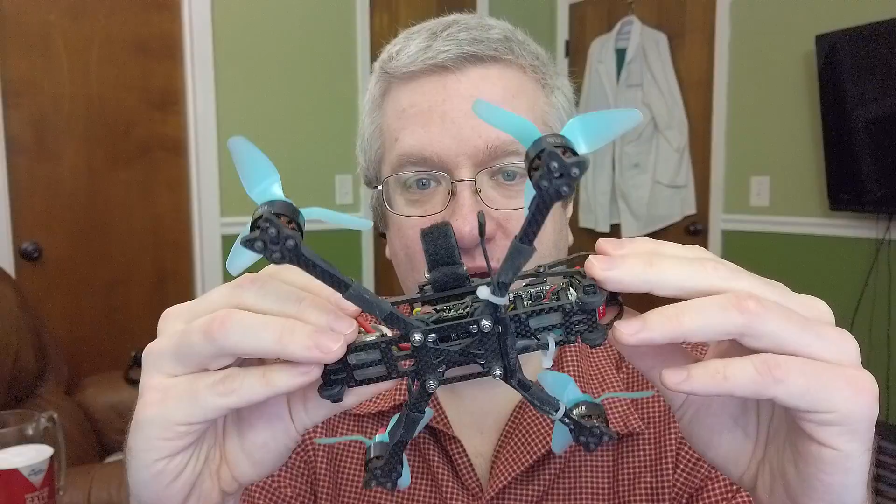But, yeah, so this is my 4-inch Kestrel. I've got 3-inch props on it to test out right now, but I'm excited about this. I don't know if it's a unique design because I'm borrowing the grommets from the Acrobrat, but it's at least unique in that it's like an Acrobrat, but it's lighter, it has replaceable arms, it's open source, and it's very easy.

I'll show you today how you modify the arms in different configurations. You can just punch in an angle, you set this angle here, and you set the length from this point here out to the motor. And you can put whatever size props on here you want. If you want a very H frame, you can make an H frame. If you wanted a stretch X and you can see the props up here in your camera, you could do that. But that's not what we're trying to do with this.

The Kestrel's supposed to be an HD micro frame with no props in view. And with the 4-inch props, there's a tiny bit of prop in view until you do your lens correction. But I'm not too unhappy about that. But this is an interesting design. It's not the style of frame I would usually fly, though.

I fly the Hyperlight Flow Ride. We ended up focusing on Bob Rugi's frames, Kabab FPV. He makes fantastic frames for a good price. I remember at the time that I was finally going to move away from a racing style frame to a freestyle frame, I was looking at either the Hyperlight Flow Ride, these are about $45 for a frame, or the Armattan Chameleon, and they're, I don't know, what are they, $110, $120 a frame?

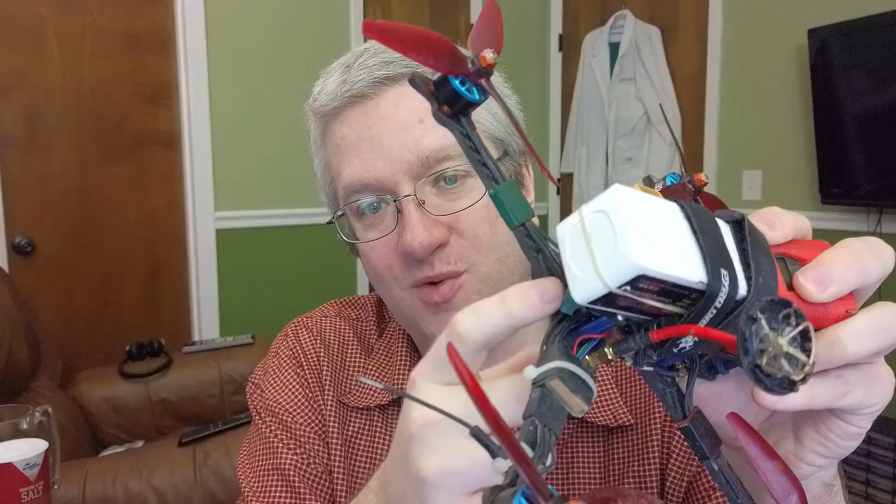And I like this layout. There's a 30 by 30 stack in the middle. There's space up in front. Not quite a 20 by 20 stack, but I've got my VTX up there. And it's just big enough for a micro camera, like a Runcam Eagle Micro. And there's hardly any room in the back, but there's just enough room for me to squeeze in my crossfire in the back. So I've got a crossfire in the back and my VTX up front.

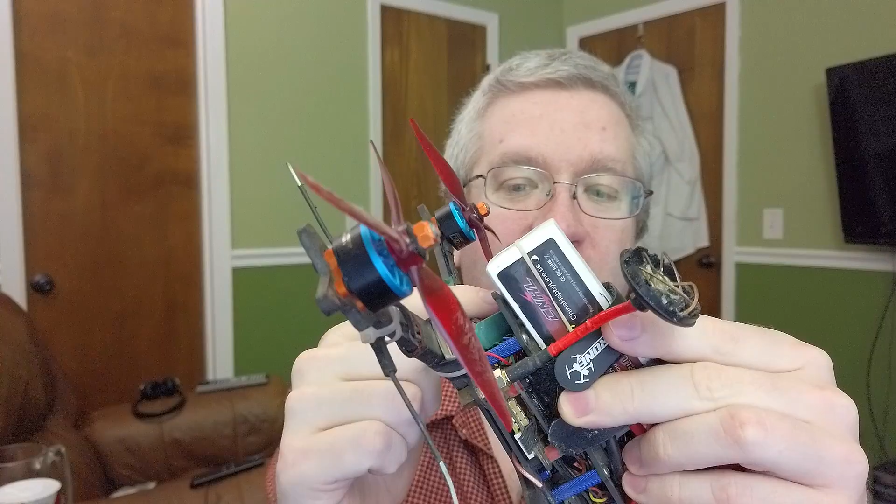And kind of a unique thing about the Flow Ride is that it comes with a back plate here. I don't know how to get this into the camera very well, but the back plate sticks off just about an inch past the bottom plate, which gives you room to keep your battery up on there without it hanging out and flapping around in the breeze. And that doesn't add much weight, and I like that.

About a week after I bought my Flow Ride, oh, hey, Judy's not, there she goes. Less than a week after I bought my first Flow Ride, Kebab released the Floss Style. And I really like the Floss Style. It adds a 20 by 20. The front end is very much like the Flow Ride, and the back has a 20 by 20 stack.

And I think the Floss Style is interesting because the top and the bottom plate are the same piece of hardware. They're interchangeable. So you can just buy spare plates and they work no matter which one you break, and I think that's pretty neat. Today he's got the Glide frame, which is a lot like the Floss Style, but it has a real 20 by 20 stack in the front, and it's probably a little bit nicer of a frame.

And I would probably move up to the Glide today if I were buying a frame, and they're reasonably priced. I think the Floss Style was about $5 or $10 more than the Flow Ride, and the Glide is another $5 or $10. It's still inexpensive. And I have no idea that I would sell my own frame, but I'd like to fly my own frame. Isn't that what I should be doing?

So I started laying down parts in the CAD. I decided that the Kestrel and the Falcon, they're both open source. It's the Falcon. I didn't tell you that, did I, Judy? The new frame's going to be called the Falcon because a Kestrel is a tiny falcon, and this is bigger, so we'll just call it a Falcon. Seems smart to me, right?

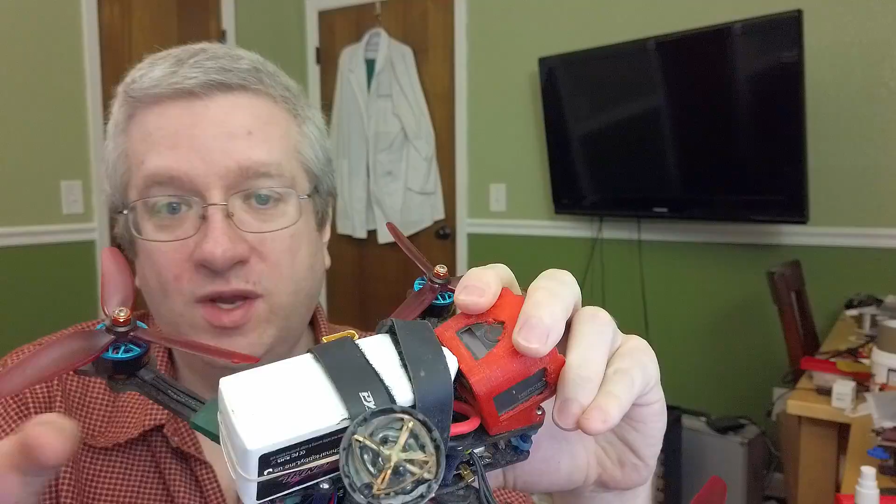Oh, geez, Judy's losing me. She's losing my face. Where am I?

She found me. So we'll have room for the 20 by 20 stack in the front, the 30 by 30 or a 20 by 20 in the middle, and an optional stack in the back. So everything up to right here will always be the same on my frame, but depending on how you configure it, you can have a third stack in the back.

You can have a truncated bottom plate and a fully truncated top plate, like one of the Flow Ride plates, or a slightly longer top plate, a less truncated top plate with room for another battery strap, so you can get two battery straps around your battery real good and still have the short frame. Because I think I like this layout with the VTX up front and the Crossfire in the back, and I could reverse that. I don't really care. Well, I can't reverse it if I stick with the Flow Ride style.

I'm going to turn my little Osmo Pocket off here. I'm going to switch to my webcam. Oh, you should see, the white balance is terrible over there. But I'm going to switch to OBS here, and I'll point out what I'm working on, and we'll see how I end up editing this.

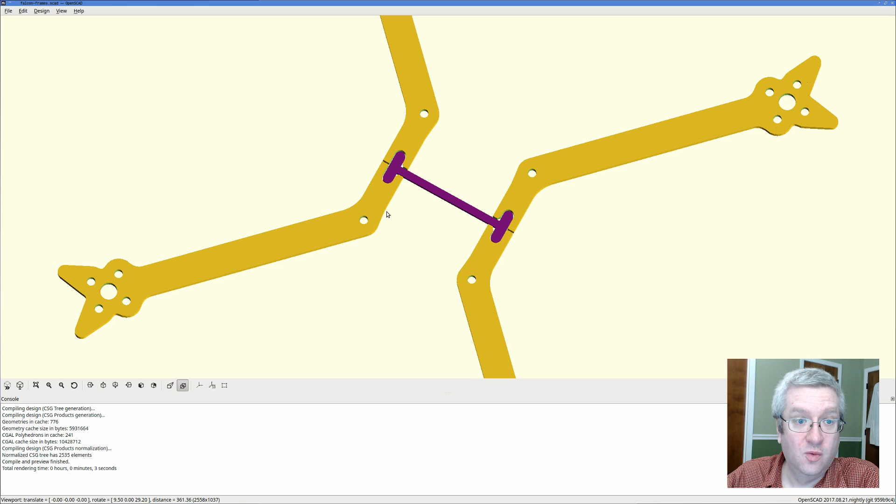We're going to start with the arms, Judy. This was the original plan here. These are the Kestrel's arms, but made longer. If we pop over to Emacs here, each Falcon frame will have its own configuration file, and I'm going to break some of this out.

A lot of this, like the frame width and stuff here, this will be for all Falcons, so that'll be in another config file, and then other things will be, like this is a 6-inch Falcon I'm working on. 25.4 millimeters times 6 is a 6-inch propeller.

But these are pretty much the Kestrel's arms, except I've made them 12 millimeters wide instead of 6 or 7 or whatever they are in the Kestrel. And yeah, this is pretty much what you get out if you put in slightly different numbers for the Kestrel. I don't think I can get away with using the wedge. And oh, for some reason my wedge is a millimeter too short. I must have a missing variable somewhere.

I don't think I can get away with the wedge because you'll see it when the whole thing is assembled, but I don't think the frame would survive one of these. It would flex quite a bit. But I'm leaving it alone.

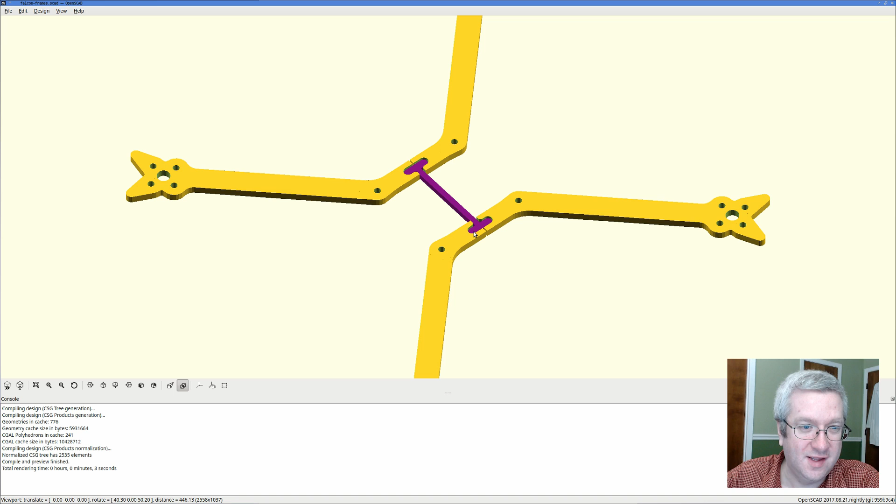I put holes in the bottom plate to line up with right here and right here, the edges of this dog bone here, so I can put screws through there. It'll be fine. I don't think it needs to be an actual hole. I think it's a slot, so you won't have to take that screw out. You might have to loosen it to change an arm. Yeah, those are the arms. They're very simple. Nothing exciting to describe there.

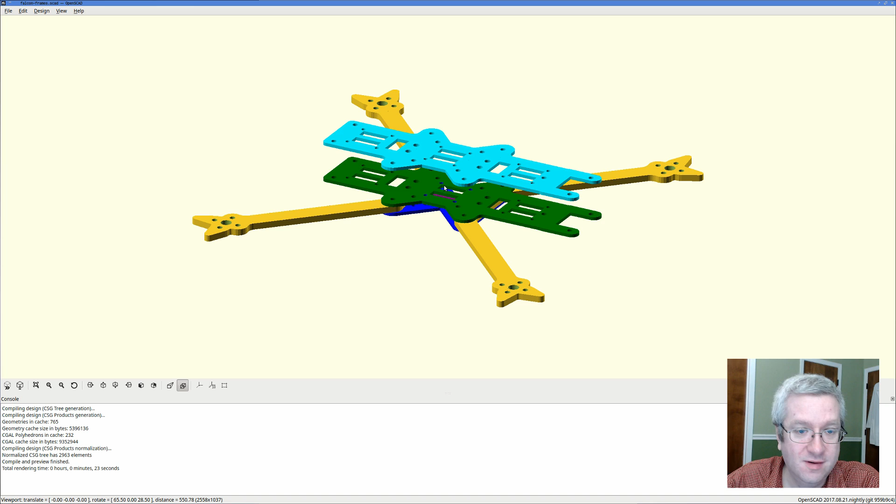So let's pop over to the big Kestrel. This is a full-size Kestrel here. Kestrel. Falcon. This is a Falcon. I hope this mic is working here. So let's pop it upside down. I re-engineered the bottom plate. Does this work if I move my mouse around so you guys can see?

These are the holes for the 20 by 20 on the inside, the 30 by 30, and these are the M3 holes for the mounts for the arm. And oh, shoot, I have to put holes in here to mount the arms. I goofed up. Make a note of that, Judy.

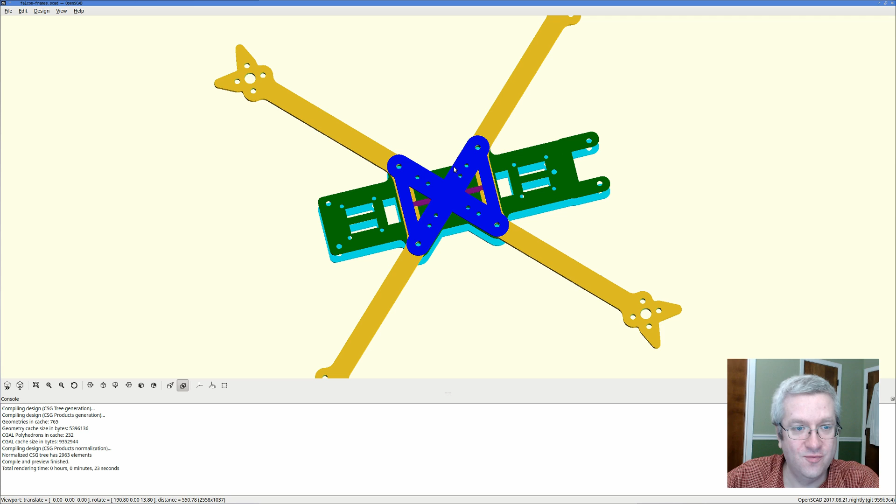So the idea here is these are at 45-degree angles. We'll cut this right along the carbon, so they'll look like they're rotated on the sheet by about 45 degrees. And that should make this pretty rigid, because the bottom plate will be cut long ways instead of at a 45-degree angle. So it'll have strength front to back, and the brace plate on the bottom will be rigid diagonally. I think that'll work out.

And I think these need to get a little bigger. There's little nubbins out here that hold the arm in place. We'll see about that. Now, the top and the bottom plate are identical. I might put a little piece of carbon underneath here to help protect the camera, but yeah, they're identical.

We're going to see where the battery ends up lining up. Maybe I should model a battery. Stick it right in here. I'm borrowing from Kabab's frames again. This is the mounting pattern for the Floss, the Flowride, the Floss style, and the Glide for the TPU GoPro mount. Not necessarily because I like that GoPro mount, but I have so many of them here. I print them all the time, and I'll just swap them over. That seems good and lazy, right? I hope so.

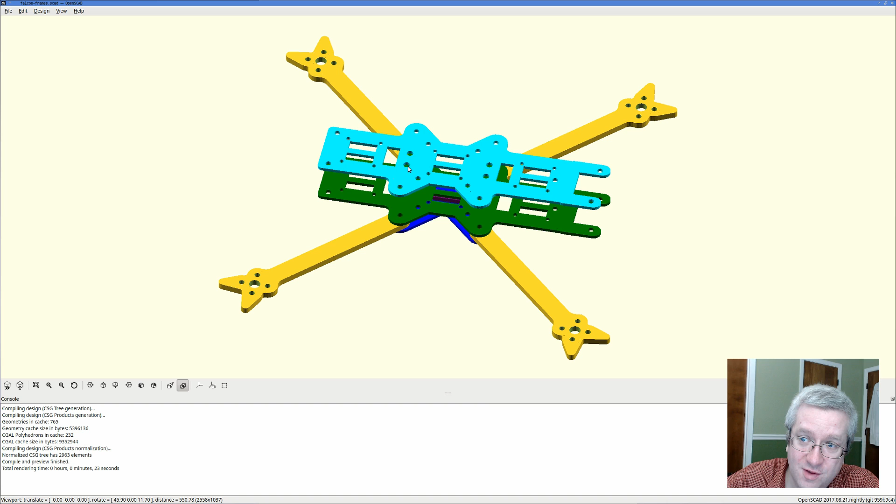But this isn't the only layout. These are the holes that I was talking about for the arms, so we can screw the arms in. But I should have one more Falcon window. Here he is. This should look familiar. It's just truncated at the back, and there's no holes back here. I have to puzzle this out and figure out exactly where the battery strap holes will go back here. Because if you're flying freestyle and you have one of these long bodies, you should have 2 battery straps. That's just how it is.

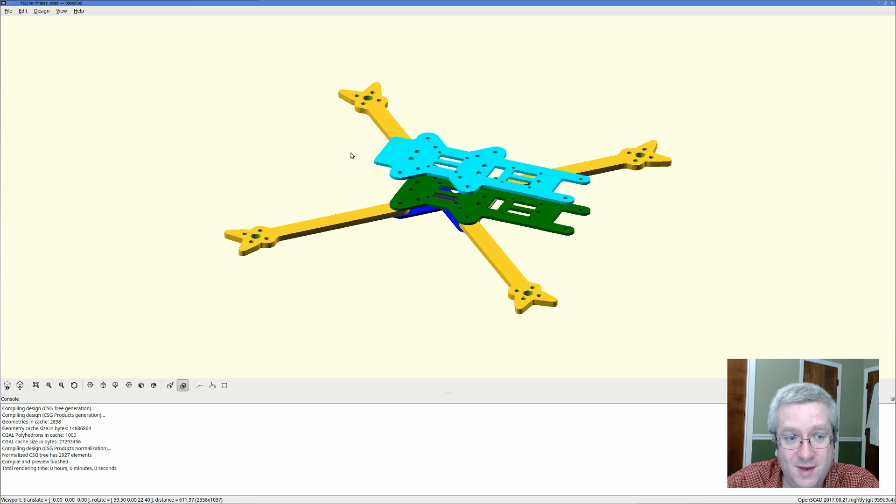Just do it. But yeah, on the Kestrel, I should have had a window with the Kestrel. On the Kestrel, these 4 bolts for the arms work great. I mean, I can flex this. It does not flex in the middle too much. These are very thin, long arms on the 4-inch, and I'm very happy with how this is holding up, and it doesn't vibrate. It's not bad. Don't think that'll work on the 5-inch.

And this is a 6-inch. I fly a 6-inch quad with 5-inch props. I like a big quad. It's just very stable. And it gives me the option of throwing 6-inch props on if I need to fly long range or something. It's just fun to have.

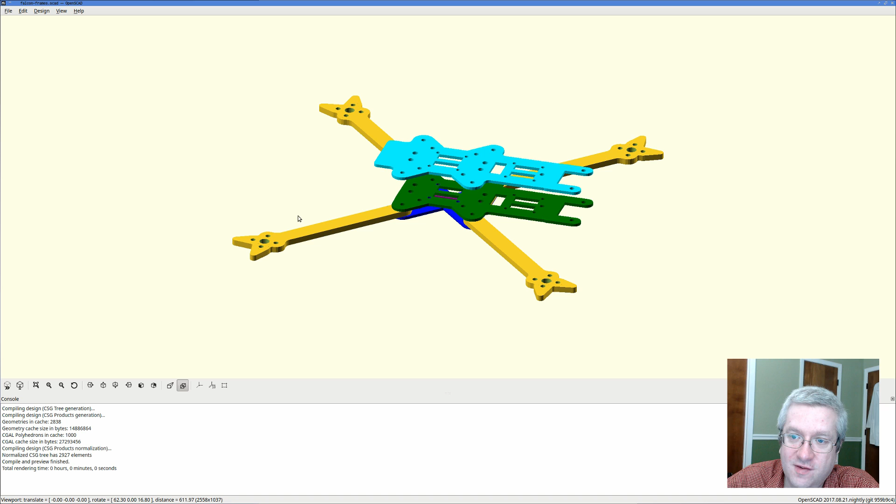Where's Emacs here? Here's my friend Emacs. And we were going to talk about arms. The arm length is from the screw hole here, the center of that screw hole, to the center of the motor. Not to the center of the frame. I'm not smart enough to set that up.

So these arms are all 105 millimeters. I think it worked out to 6 inches. I think this worked out to like 260 millimeters. I forget how I mathed it out. I don't remember. And they're right at 45-degree angles now. And I don't know if this is the way it's going to be in the final design. Let's, I can't see this because it's behind my camera.

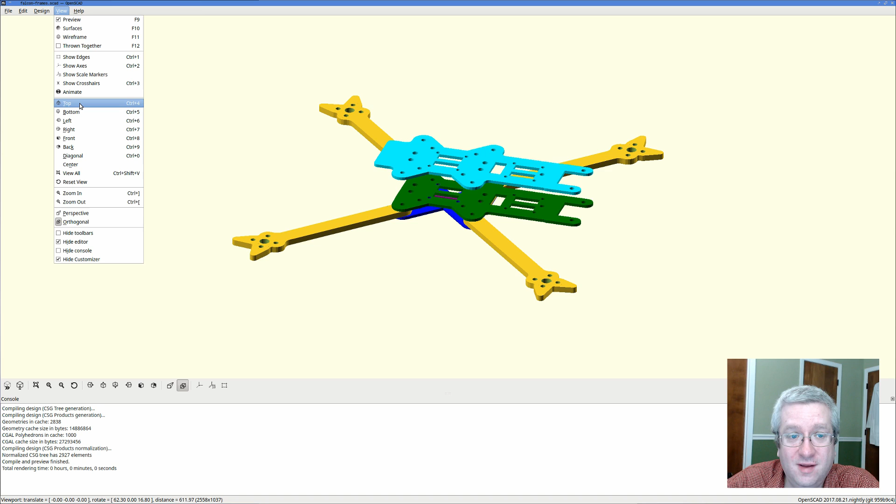So the camera lens and sensor sit real close to these screw holes, and this puts the motors on 6 inches just in front of the camera, and that's about where it is on my other frames. And this is where it's uncreative, right? I'm laying things out like the frame that I enjoy flying, that I already have, and I think that's a good place to start, and we'll see where it goes.

I have a feeling that when I cut these, none of this is going to look anything like this. I'm going to learn that this way out here, this looks like it's out in the ocean, like the dock, just sticking out there. It's probably going to look silly, but I don't know. We'll find out.

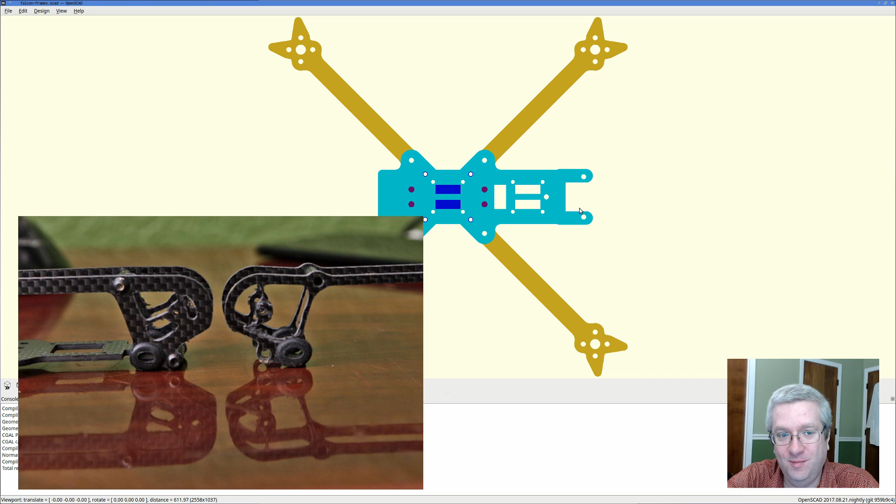When I cut the first Kestrel, this is tiny, I don't know why I'm showing you here, but the thickness of this top plate here, it's very thin now, but I said, like 6 millimeters will be fine. 5 or 6 millimeters or something. I cut it, and it was a tank. It was super sturdy, way bigger than it needed to be. It looked fine in the picture, but not in real life. So we'll see.

But I'm going to go back, I guess, to talking on the Osmo Pocket here, where I might look a little less blue.

Brian and I are talking about doing another quadcopter build class. We've done 3 of them at the local makerspace. The first time we built a 450 millimeter quadcopter, the same quadcopter that Brian was dropping fun things with last week. We built my first 3-inch quad. About a half a dozen people built the PH-145. And then we did our best to put together a kit for a budget 5-inch FPV racer. And it was all right. We did okay there. But I think things are a lot better now.

I'd like to do a class where we build a Kestrel with the HD camera, something very much like this, but with the 3-inch arms instead of the 4-inch arms. And I like the price point that we can get this at, because we can build this with a turtle for about what it costs to build that 5-inch with the cheapest CMOS camera we could find at the time. So I'm pretty excited about that. So maybe we'll start having frames manufactured when we schedule that, and that'll be exciting.